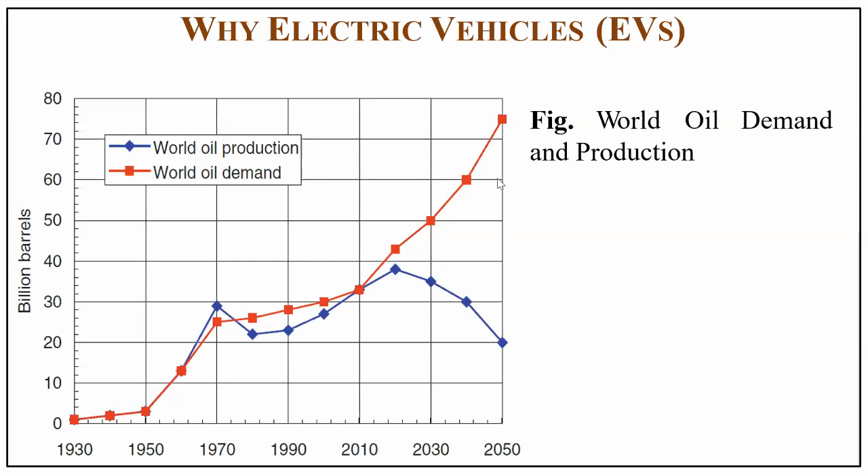If we look at oil, the demand keeps increasing. By 2050, the demand is almost 70 billion barrels, but oil production is only 20 billion barrels. So we will not be able to meet the demand and supply gap, and since demand is higher, the price will increase. Once the price increases, the transportation cost will also increase. So the only way to reduce the cost of transportation is to move into electric vehicles.

Now coming to this plot, you can see this is the total CO2 from all activities. Comparing the 19th century to 1950, the change in CO2 emission is very small. But if you look from 1950 to 2000, within that period, the CO2 emissions from all activities has increased drastically.

So to reduce these CO2 emissions, we are focusing on electric vehicles. You can also see here the graph for CO2 from coal, and this one is CO2 by cement production. Here, CO2 by oil is higher than CO2 by coal, so we are focusing on reducing CO2 emission from oil by promoting electric vehicle technologies.

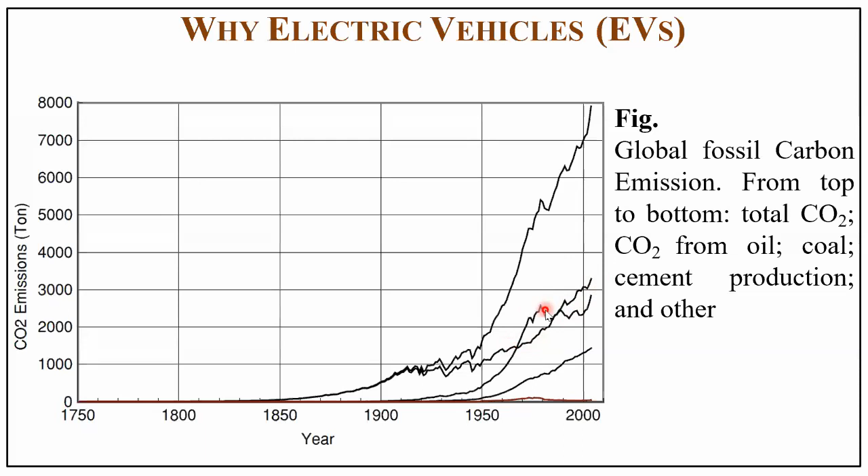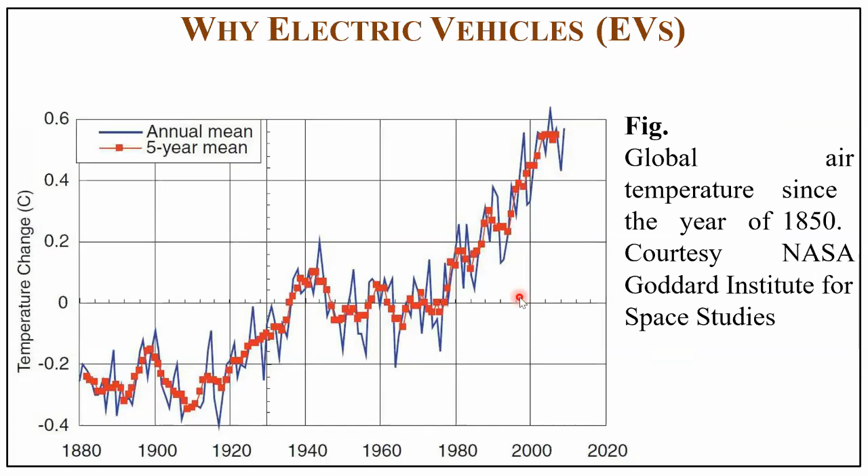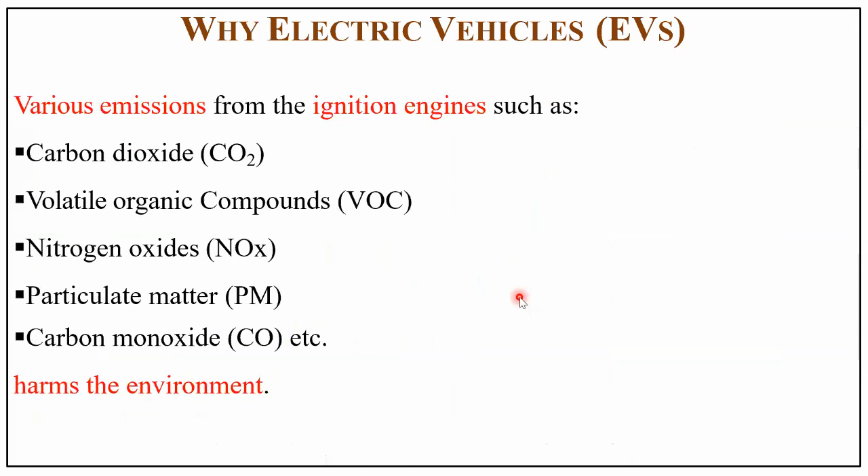This is because of various emissions like CO2, carbon monoxide, and others, which pollute the environment as well as increase the temperature. Coming to the Paris Agreement, as I mentioned earlier, they came up with objectives to reduce the temperature rise below 2 degrees centigrade compared to the pre-industrial level. At the same time, they have a plan that within the next 10 years, the temperature increase should be limited to 1.5 degrees centigrade. For this, they are strengthening the ability of countries to deal with carbon footprint. So climate change is also one of the reasons.

Another way to reduce the carbon footprint is to increase renewable energy technologies. Wind and photovoltaics are playing a huge role in the renewable energy sector. In India also, they are proposing to install 175 gigawatts of power production from wind and photovoltaic.

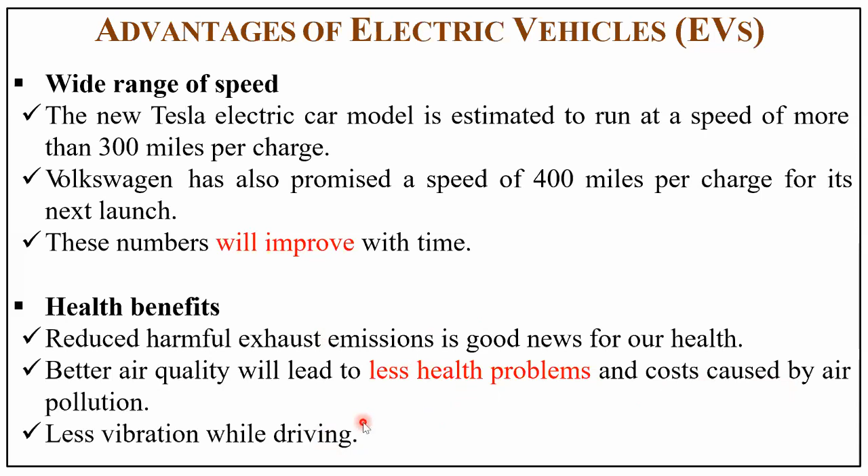You get very less noise, and even if you have less moving parts in your equipment or system, your maintenance cost will be reduced. So you need not have any lubricant oils or periodic maintenance for electric vehicles like your IC engines. Even the IC engine's maintenance cost differs from petrol to diesel engine. But with electric vehicles, you need not spend much on maintenance cost. So that's what they are claiming, that the maintenance cost is very less compared to fossil fuel based vehicles.

So what are the advantages in terms of electrical system infrastructure? Suppose if you want to promote electric vehicles, you need much charging stations. But in India, we could not see charging stations even at fuel stations like petrol pumps. If you're having many charging stations on the highways like your petrol pumps, there's a chance to promote electric vehicles faster. That's why companies like Tata Power, Adani Power, NTPC, Power Grid and others are coming into the picture to install charging stations.

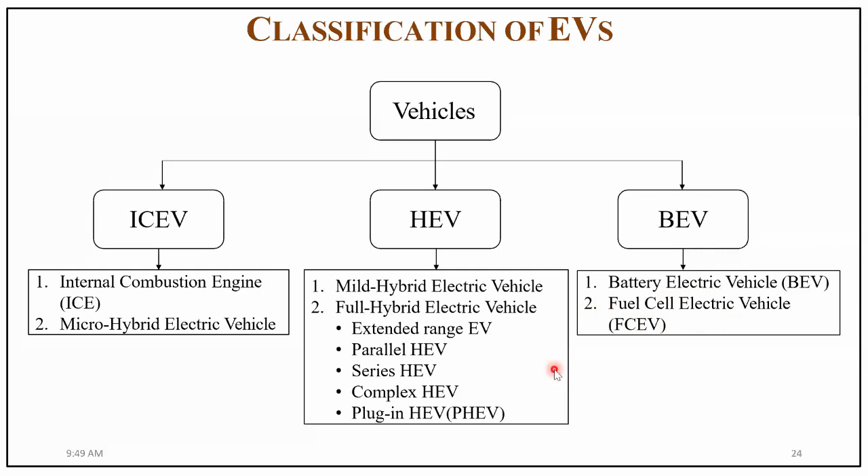So it's a battery electric vehicle, or you can say fuel cell vehicles - instead of battery, we have the fuel cell stacks. By using fuel cell stacks, you can generate electricity, which can be used to run your electric motor in EVs. Here the source is hydrogen - we have hydrogen tanks on the vehicle that supply hydrogen to the fuel cell stack, which generates electricity, which then runs your motor. This also comes under the full EV - that's called FCEV, fuel cell electric vehicle.

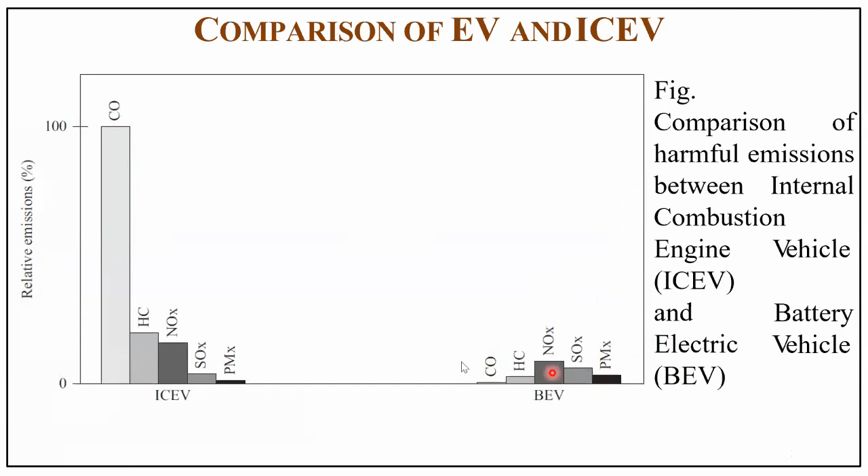So when we compare electric vehicles with IC engines, you can see the fuel emissions and gas emissions. In IC engines, the CO and CO2 emissions are higher, but in battery operated vehicles or fuel cell vehicles, we have less pollution compared to combustion engines.

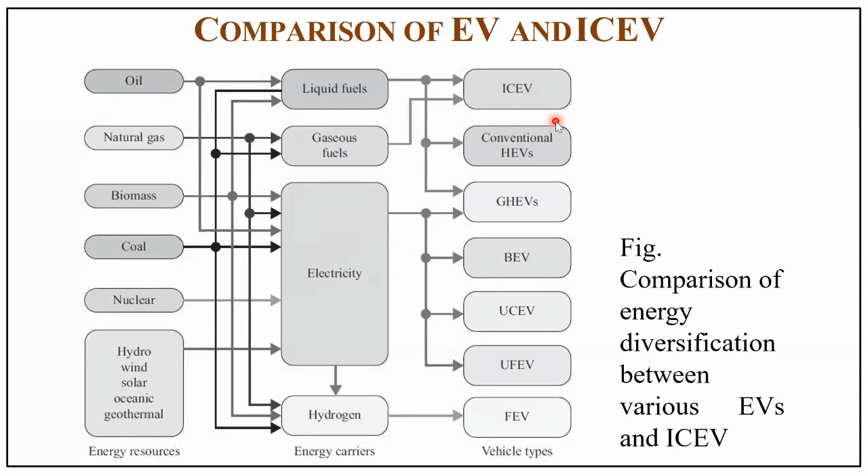In earlier cases, with IC engines, we were using oil directly on the vehicle, running your IC engines, right?

This is the comparison of EV and IC engines. This will give a very good comparison of why we are going for electric vehicles.

So the efficiencies given here are tank to wheel efficiency. When we talk about justifying the electric vehicle technology, there are two efficiencies: one is tank to wheel efficiency, another is well to wheel efficiency. If you compare the tank to wheel and well to wheel efficiency of IC engine and electric vehicle, you can easily justify why electric vehicles are superior to IC engines.

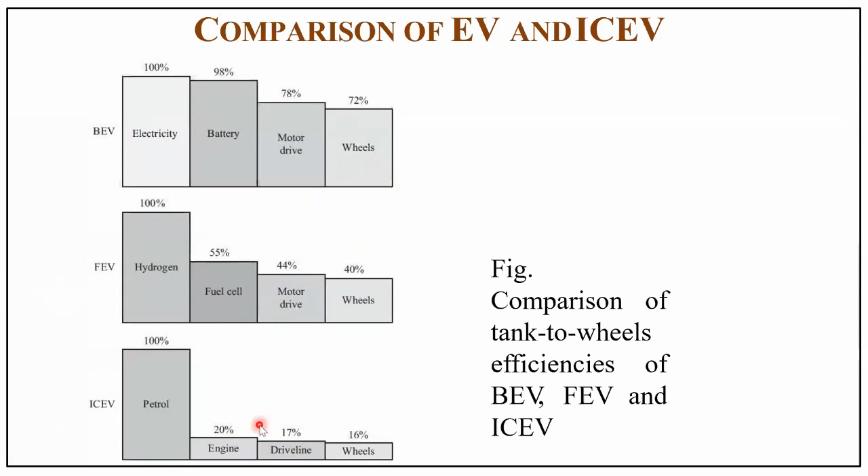Again, people may ask: okay, electricity is also generated from fossil fuels, so instead of generating electricity in thermal power plants or gas power plants, why not just put the oil in the tank of my vehicle and use it directly? So let's see the efficiency difference. The same crude oil is the source for both EV and IC engines - in an oil refinery you get higher efficiency.

But instead of directly transferring to the vehicles, you get 13% efficiency. The same oil can be used in the thermal power station, so power generation is 36%, and then you get transmission and distribution losses plus charging losses, during which you lose some more, giving an efficiency of 18%.

So when we calculate the well to wheel efficiency, from the oil well to the vehicle wheel, the battery operated vehicle gives 18% efficiency, while the IC engine gives 13% - so 5% more. If you calculate this across the number of vehicles used by any country, that 5% energy efficiency difference is huge. That's why governments are putting a lot of interest into promoting electric vehicles nowadays.

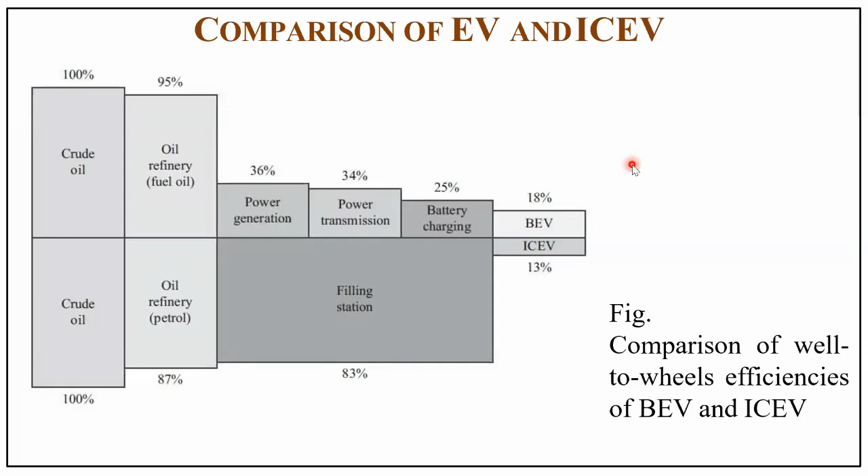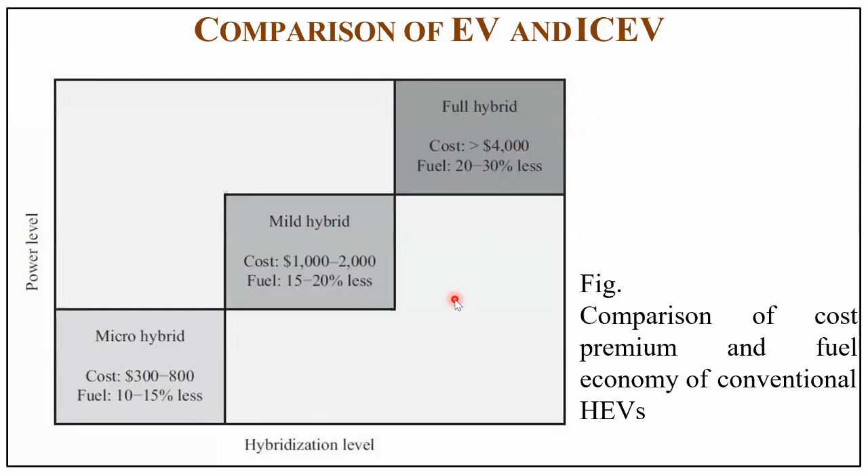So when we come into the state of the art EV, we talk about the electric vehicles and the motor drive technology. There are different types of electric drives used in electric vehicles: AC drives and DC drives. Most probably we will use AC drives in electric vehicles.

Then the next one is battery technology. If you want to reduce the weight of the electric vehicle as well as increase the speed range and distance with a single charge, we use different batteries. Earlier we just used lead-acid batteries. Now lithium-ion batteries are the best candidate for electric vehicles, and some other technologies are also coming into the picture, which we will discuss in future slides.

Then charging technology. Here again the power electronic engineers play a huge role in battery charging technology. What type of charger do we require? There are two types: fast charger and slow charger. Then we can also classify chargers as unidirectional and bidirectional chargers.

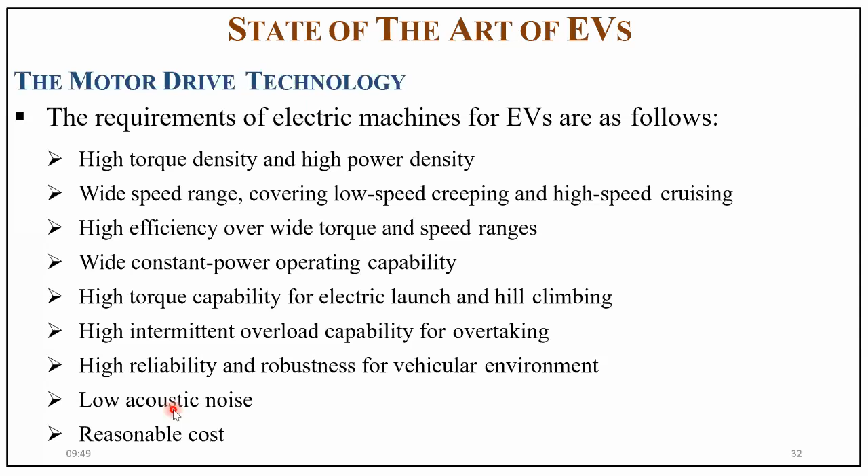Even in industries, there are a lot of electrical drive companies available providing drives at very reasonable cost. For example, ABB and Crompton Greaves give very reasonable drives, and GE is also in that technology.

So here are some additional requirements of electrical machines for hybrid electric vehicles. During regenerative braking, it should have high efficiency power generation so that we can save energy in that case.

And during wide speed operation, it should maintain good voltage regulation at the DC link — the DC link between your inverter and the battery charger. So we have to maintain good voltage regulation. Even if you change speed from low to high, or drive your vehicle from low load to high load, you should maintain constant voltage at the DC link so that we can achieve precise speed control in electric vehicles.

This is about properties that can be integrated with the engine, where engine means electrical drives. When we come into motors, there are two types: one is commutator drive, another is commutator-less. As discussed in electrical machines, commutator-less based machines are getting attention with EV technology.

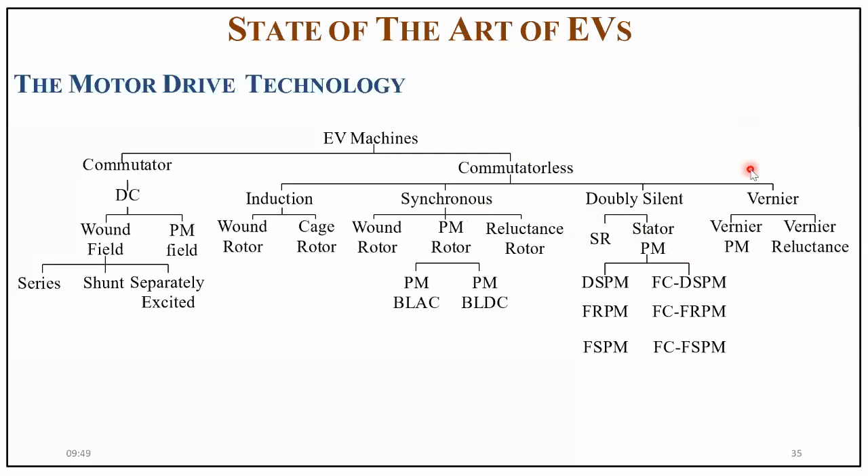But in electric vehicles, they are trying to use double salient machines and vernier based machines. In double salient machines, we have salient poles in the stator and rotor. The disadvantage of double salient pole machines is speed range, so you will get only a very less speed range.

In vernier machines, they use the vernier effect to amplify the output torque, so the output torque is higher during low speed conditions. That's the advantage of vernier machines: low speed, high torque, direct drive applications. During low speed conditions you get higher torque.

Here also you need not use any kind of gearboxes, you can directly drive the vehicle. That's the advantage of vernier machines.

There are a lot of technologies with machine morphology: axial flux, linear flux, and transverse flux. In electric vehicles, mainly axial flux morphology is used, and rarely linear flux and transverse flux morphology are used. The reason is to integrate the electrical machines with the vehicles, so they won't prefer linear and transverse flux morphology; they prefer axial flux morphology.

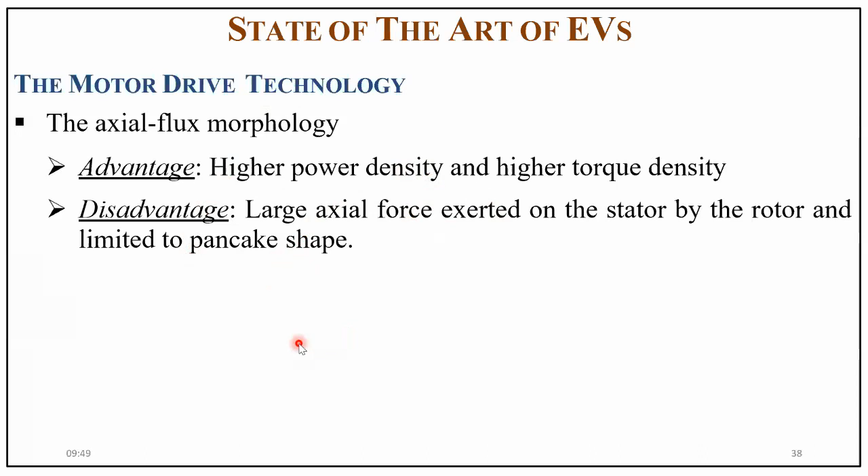Axial flux morphology has the advantage of high power and torque density. But because of this axial force, it won't fit into the pancake shape, so normally when we come into the design of drive lines, this creates a problem. Otherwise, axial flux morphology is best suited for electric vehicles.

Linear flux morphology is very less attractive to EVs. Transverse flux morphology is also not suited for EVs, but it provides very good torque density. However, the machine structure is very complicated, so they won't prefer this type of morphology for EVs.

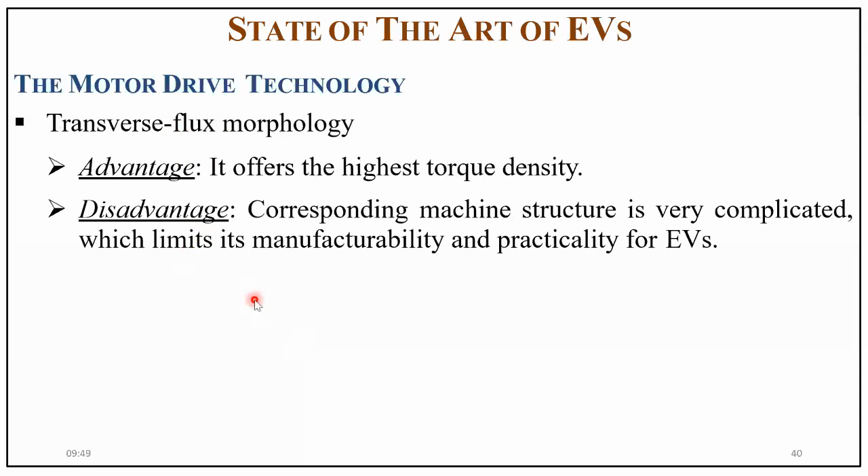Coming to the propulsion system, we have two technologies: ISG, integrated starter generator, and EVT technology. Even in your passenger car you can see EVT, electric variable transmission. These technologies normally come up when we talk about hybridization of electric vehicles.

If you are combining your electrical motor and IC engine, then these types of terms can be heard. Because of this integrated starter generator, you can black start your vehicle, as well as whenever you are going downhill, save the energy in the case of ISG based systems.

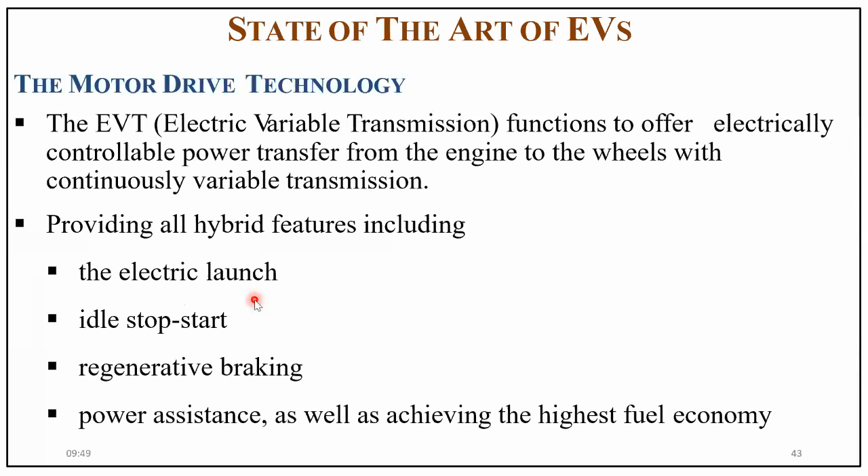Then in the EVT also, regenerative braking and even black start are possible.

Okay, this general is coming to the drive line. So in the drive line, how we are transmitting these things, and just directly going to the energy source technology. So in energy source technology...

If we are talking about the batteries, here we mentioned the four energy sources. One is batteries, ultra capacitor. From the energy density perspective, the batteries will provide the high energy density. When we talk about the capacitors, it will provide the high power density. So battery will provide the high energy density, capacitors will provide the high power density.

So if you hybridize, you get the best characteristics of the battery, having high energy density, and capacitor having high power density. If you want to increase the distance, for example, if you want to run your electric vehicles for 300 to 500 kilometers, then the best candidate is battery. But if you want to start up your electric vehicles with heavy load, or if you are going down to high in the hills, that time you need high power, for a shorter period of time. But here you require power for a longer period of time. So for getting both characteristics, best you can hybridize these batteries and ultra capacitors. So you will get these characteristics.

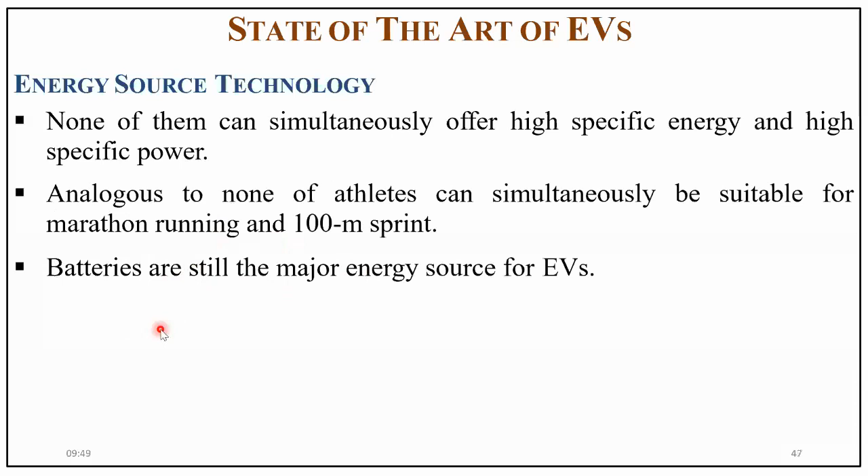We are talking of EVs. So if you are choosing lead acid batteries, again the maintenance cost will be higher, the energy density also is lower than the lithium ion batteries. So the best candidate is lithium ion batteries for the EVs.

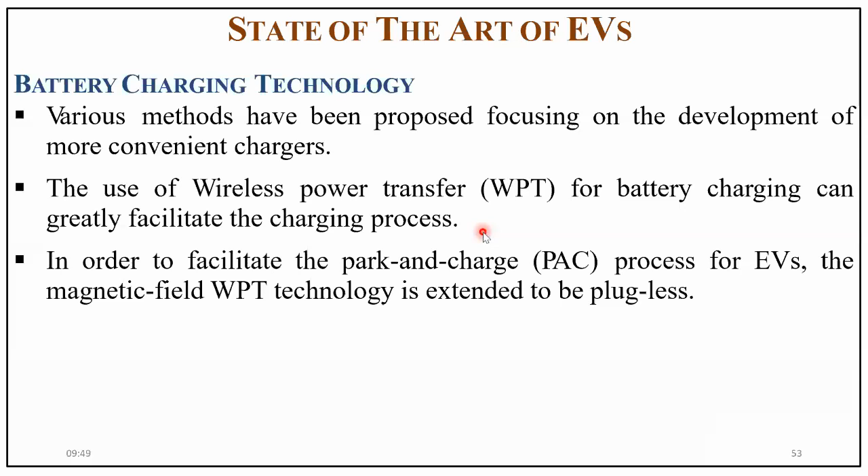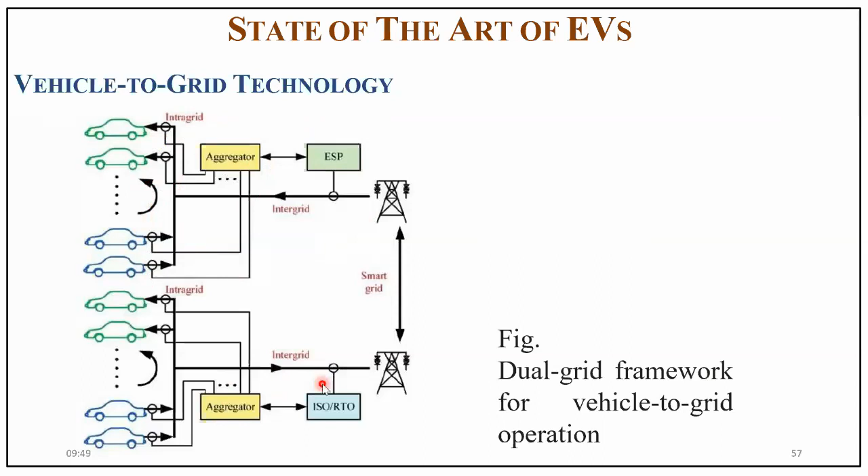So when we talk about vehicle to grid, it will provide a lot of ancillary services and everything, so that can be checked out. When we talk about that, you should have the aggregator, which can be implemented by the distribution company. As individual consumers, we cannot play with that. This involves infrastructure development that can be taken care of by power companies. Because of this aggregator, whenever you are parking your car, you have to connect with your charger cable, so based on the number of vehicles in the particular area or building, you can aggregate it. That will provide ancillary services to your grid.

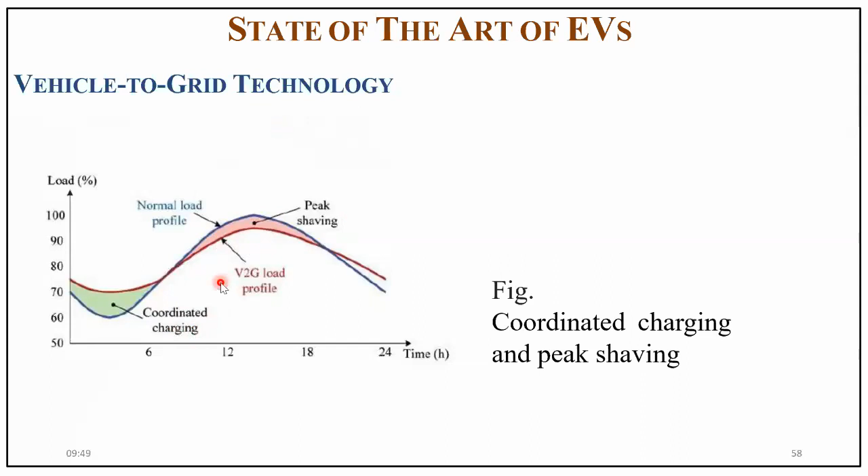This can be done by the distribution companies. This involves peak shaving and how we can play with the demand response management algorithm. By aggregating all the EVs in your network, you can play with the demand response management in the power system perspective.

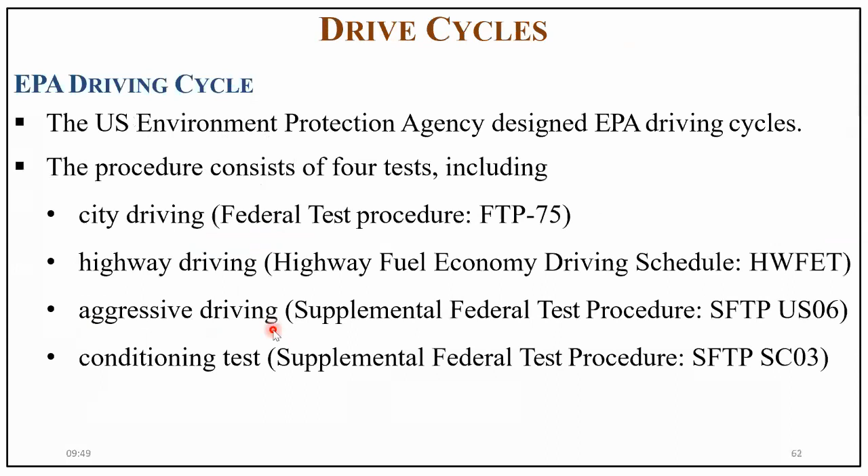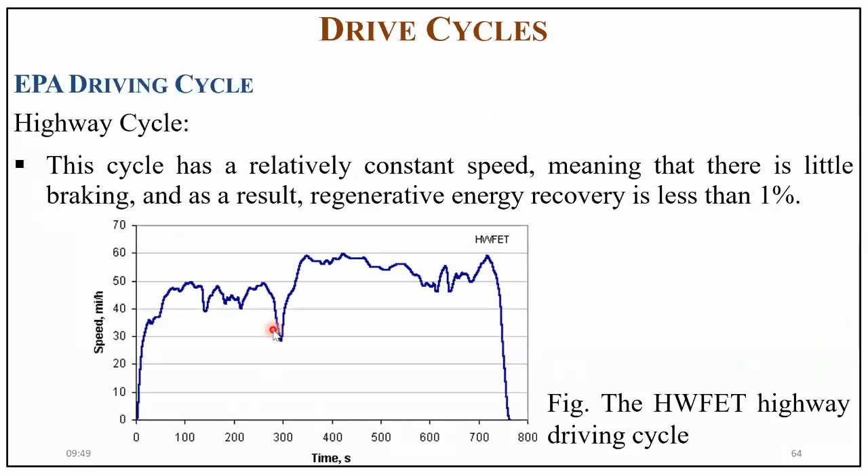So these are the testing standards. If you are really interested to check with the testing standards, please go with that.

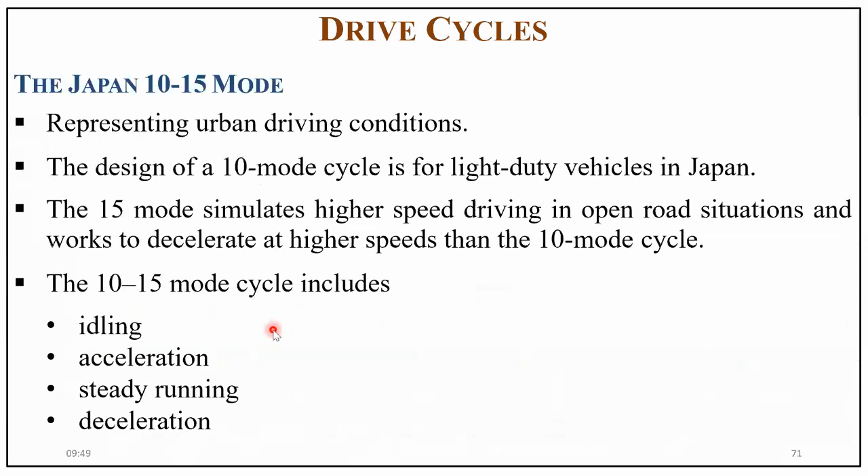There are European standards, as well as US standards and Japanese standards. Normally, all these drive cycles will be checked with these standards before coming out of the company. So if you are really interested to check these drive cycles, please go ahead with these slides.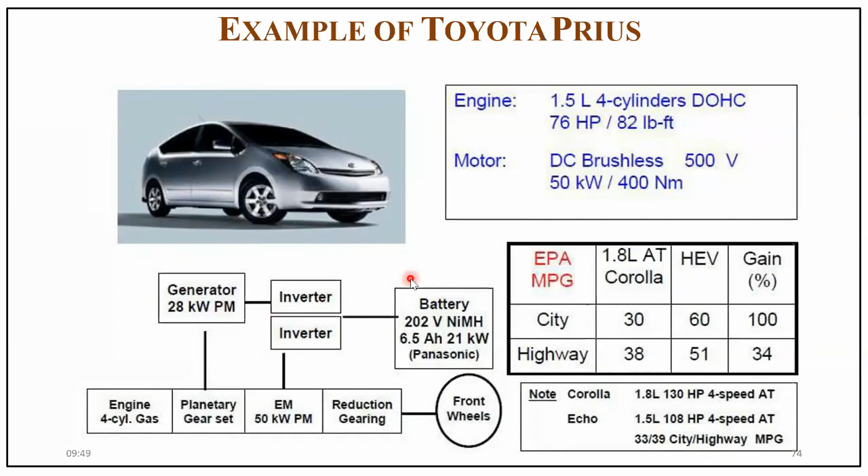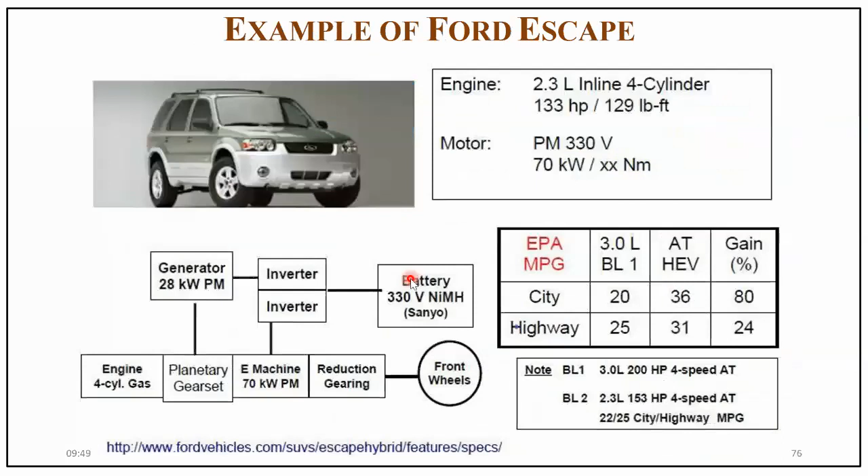So these are the hybrid vehicles, where we have the battery as well as IC engine. The battery can operate your electrical motors, connected through inverters, in a 50 kilowatt range. There is a 20 to 28 kilowatt permanent magnet machine connected with the planetary gear set, which can generate power and charge your battery. So during vehicle operation, both can support driving your vehicle's wheels.

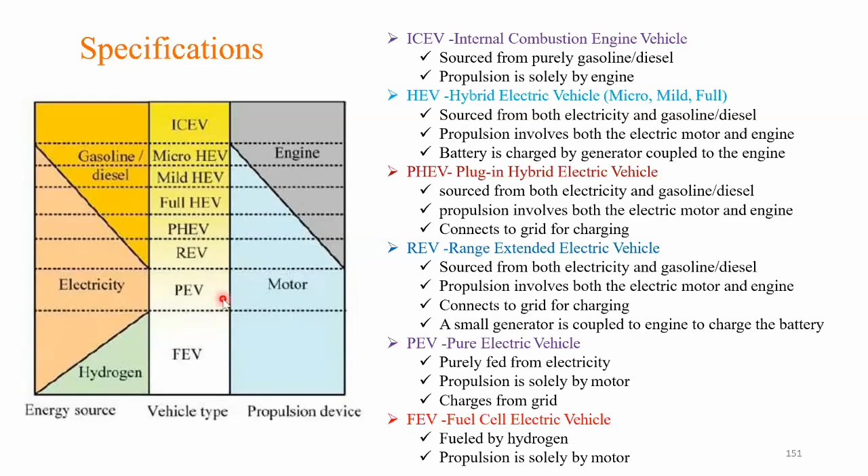How about the braking system in e-cars? Will it be as good compared to disc brakes in normal cars? If you are talking about disc brakes, this will provide a very good braking system to use.